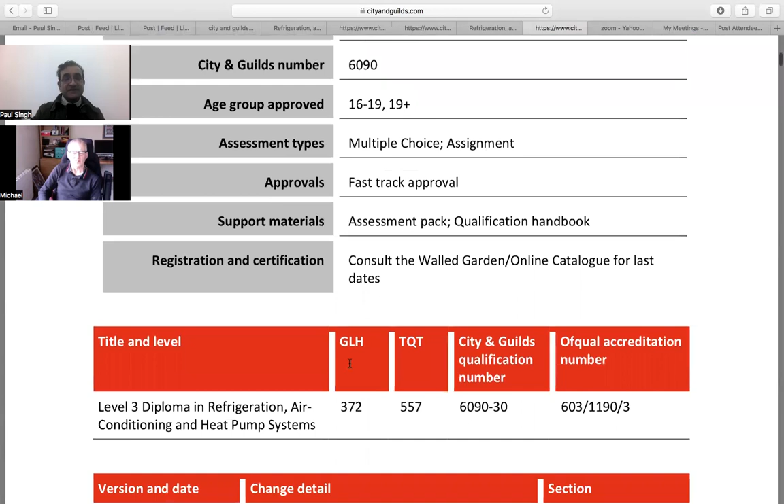Tend to forget the hours. These are just guided learning hours. That's the total qualification time. Forget that, this is just the updates.

So what we got there is this. These are the units now. This is what the engineer is having to work towards. You've got Unit 201, which is health and safety in the RACHP industry. This is a level 2 assignment.

Unit 301, applying fundamental principles to RACHP systems. Unit 302, complex RACHP systems. Unit 303, commissioning and troubleshooting complex RACHP systems. 304, work planning and organisation for RACHP systems. And then Unit 305, electrical power and control for RACHP systems. So that's the bulk, that's what they got to do.

Okay, so they got 201, 301, 302, 303, 304, 305, and those are the headings. If you go into the qualification handbook, it gives you a lot of information on how it was put together, all the information. And what we're saying here is that these are the unit titles.

So you've got health and safety, mandatory. These are the assignments, bits and pieces. And they tell you that's what the guided learning hours are.

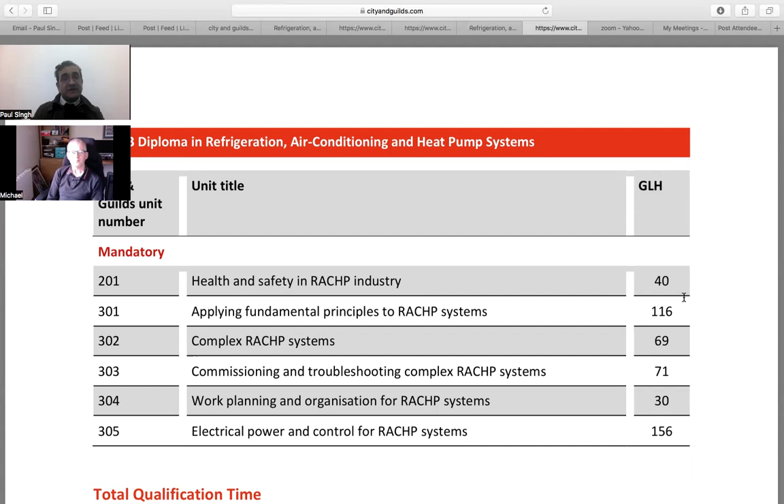So these are my experiences, what I've been doing, and this is what I want to tag on to. So we got those, I'm not worried about those. Then the centre requirement tells you what you need to be able to have, bits and pieces. And then you get into, this is telling you what this is.

So you've got 201, health and safety in RACHP. There's a practical assignment on that. In addition to that, there's a test as well, health and safety in RACHP industry. It's a multiple choice test.

Then if you look at the rest of it, 301, applying fundamental principles to RACHP systems, that's an assignment. 302, complex RACHP systems, that's an assignment. Commissioning and troubleshooting complex RACHP systems, that's an assignment. And then work planning and organisation for RACHP systems, that's an assignment. And then electrical power and control RACHP systems, that's an assignment as well.

Now, to cut through the chase, the health and safety test is an online test. The practical assignments here, that's a practical assignment, so it's hands-on. They have to physically do safe isolation, be able to use steps, apply health and safety, put up scaffolding, pressure testing, and that's part of the assignment.

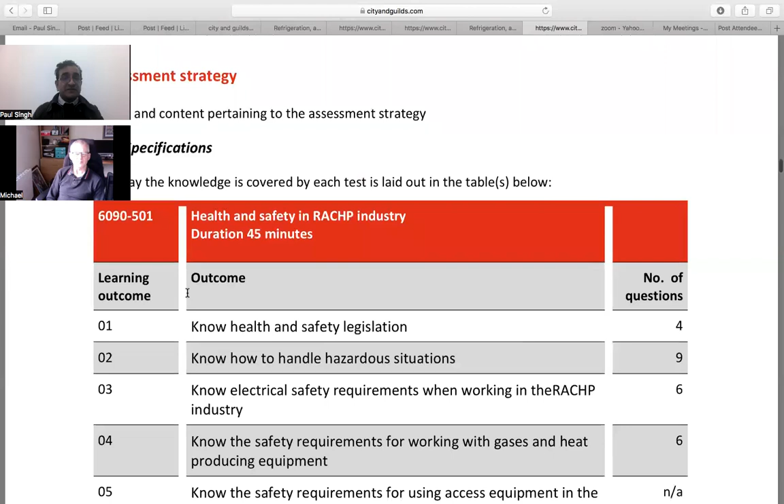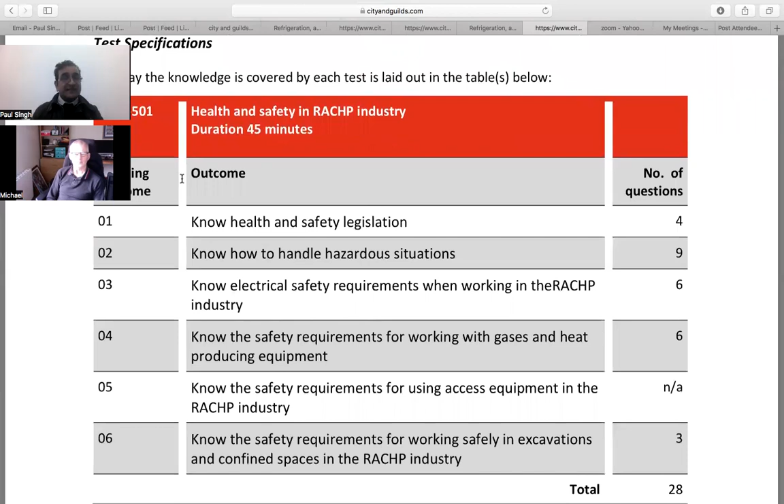If we break down the health and safety, this is telling us what they need to know. So for the test, there's 6 sections, and these are the number of questions. So I do apologize, 28 questions.

So this is telling the engineer. What I tend to do is say to the engineer, look, do you know about that? Do you know about that? And what you don't know about, let's discuss it, because we can actually go into the syllabus, a bit like a skill scan.

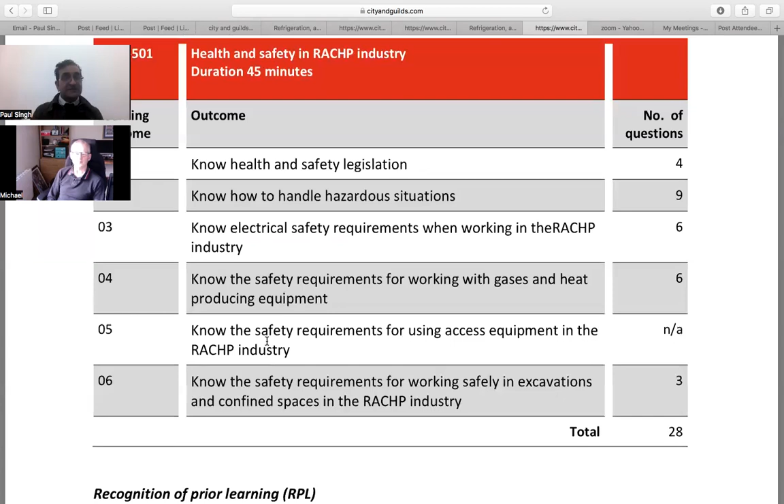So, for example, and I do this all the time, this is the unit, this is what they need to know about, the theory side of it. We just say, do you know that lot? And I'll sit them down and they tick off what they can do, what they don't know, and then we make a training plan.

I had a situation with this particular engineer who came in and said, yeah, I can do that. So I said, okay, let's book you a test. And they sat it and passed, 85%. So if they know it, I only need to teach what they need to know, and then they sit the test and pass.

I do find with health and safety, a lot of it you'd say is common sense, and a lot of it should be obvious. But there's always things that you haven't seen that someone else has.

That's right, very important. I have got that qualification, it's just something I never thought to tell you. I have got a health and safety, I've done the skills on site because we've needed them in the past, and to me they're so easy to pass. But it doesn't mean that's right for everyone, because you're experienced.

If you think of a 16-year-old who's just been on site for 2 weeks, there's no way they're going to know all that. Of course not. And that's where the training comes in.

Of course, and if we've got competent engineers, they'll fly through this. I've had engineers who'll say, yeah, I'll have a go. They'll read it and say, yeah, I know that. Okay, sit you down, pass it. So they've saved that many hours.

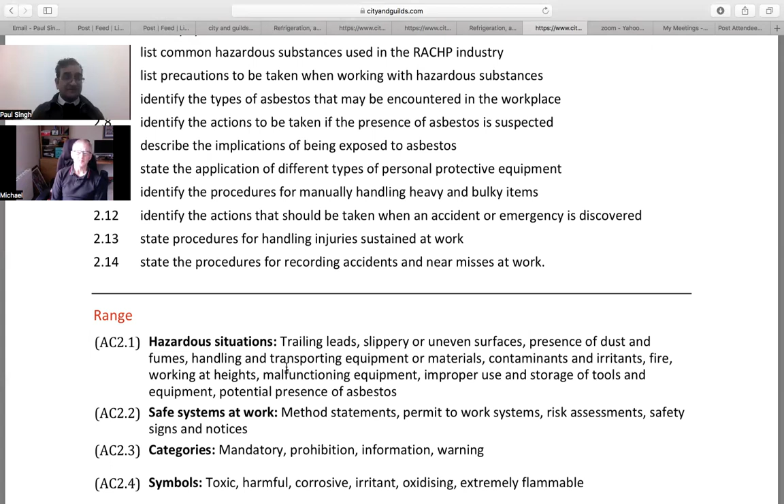Yeah, that's it. I've done asbestos courses, maintaining scaffold towers, all those sorts of things, and it's handy to know things you wouldn't have thought of. A lot of it is excavations, trenches and excavations, they can collapse and stuff like that, they need to know about. The other one is asbestos, the 3 different types of asbestos and all that lot. So there are bits that they need to know, they don't come in knowing everything.

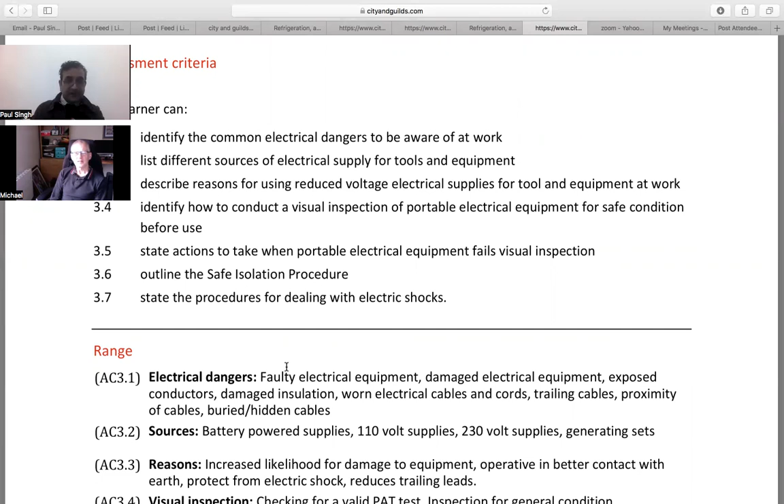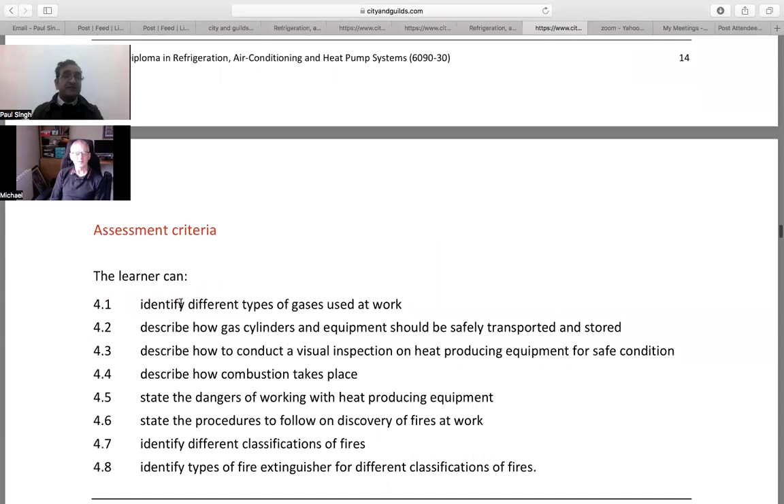I do sit down and do a tutorial with them, whether it's like this or face to face, it doesn't matter really. So we've got the unit, and they tell you what they need to know about and what they're going to be assessed on, the assessment criteria, so the learner can do all that lot. That goes for each unit, so that's the health and safety one.

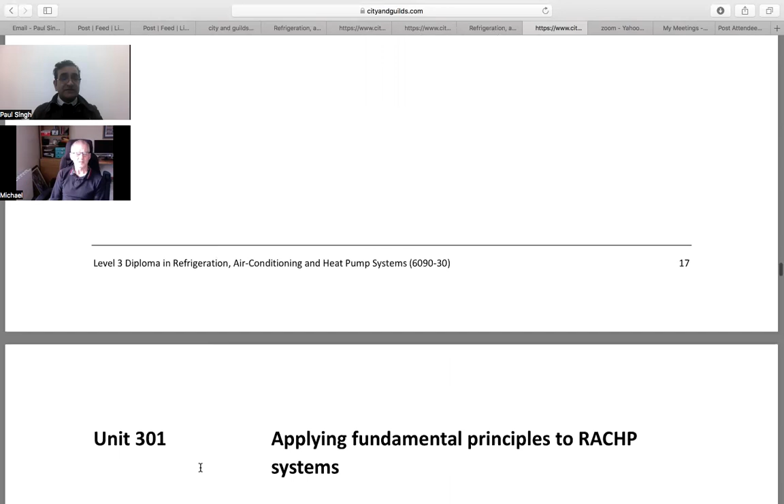If we look here, Unit 301, applying fundamental principles to RACHP systems, this is a theory one. It's saying here, if you look at the unit aim, this unit allows learners to explore fundamental principles to develop their understanding of RACHP systems. There's particular emphasis on system design and efficiency, and the use of both Ph and psychrometric charts as data sources. The unit concludes with theoretical calculations being applied to a range of practical systems an engineer is likely to encounter. So there's no test on this theory.

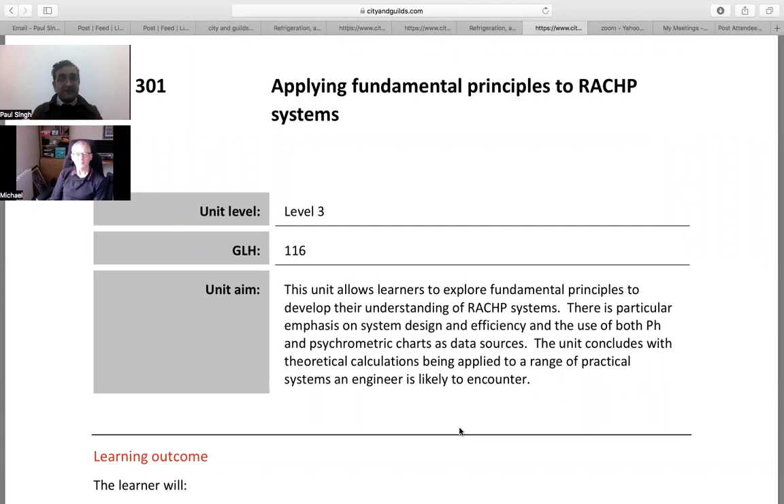This is telling you what the engineer needs to know, and if they can do that, then they can attempt the assignment, because they've got an assignment book as well that they do. So for each unit, 301, 302, 303, 304, 305, we've got the syllabus items. Based on the syllabus items, City and Guilds have got assignments that the engineer does when he or she is ready for them.

So my philosophy, my thought process would be, can you do all this lot? And you probably can't, with respect. There'll be some tuition that is required, and then that tuition would be given to you like this now, or we could say, right, if you go onto this website, there's a nice video on this.

Look at it, so I'll be preparing you for the assignment. If you know all of that, then I can say, okay, let's just go through the assignment itself.

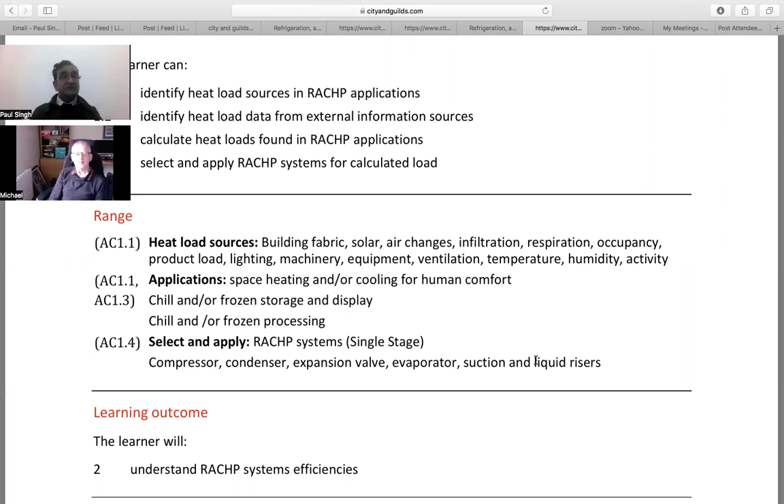So this bit is telling us about all the outcomes. It's 302. This one here, you're saying the purpose of this unit is to provide learners with the understanding of complex RACHP system components and their interrelationship for a range of applications. Learners will understand the construction and design of a range of system types operating on common refrigerants.

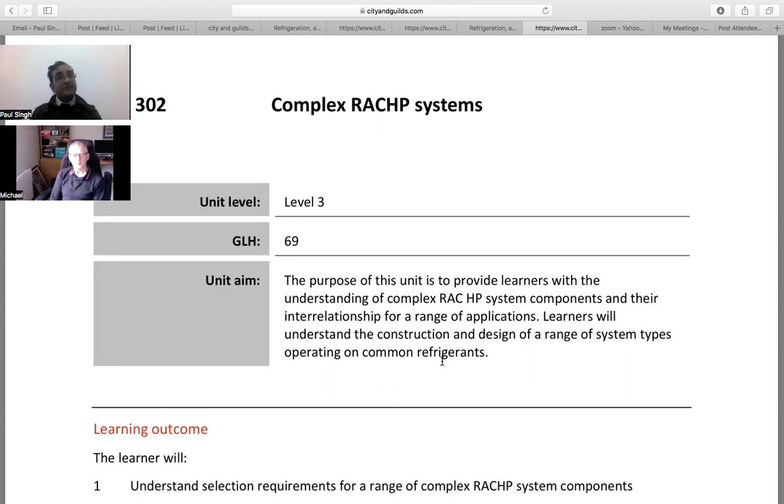So if we look through the RACHP systems, they need to look at direct expansion, flooded, pump overfeed, cold store, chill store, water chiller, VRF, VRV, air conditioning, ground and air source heat pump, cascade systems, compound systems, transcritical absorption systems, booster systems, different compressors, different refrigerants, hydrocarbons, HFCs, HFOs, R717, R744.

So it's complex. Yeah, well, it looks like it covers most things, doesn't it? Or probably everything. Yeah, more than enough.

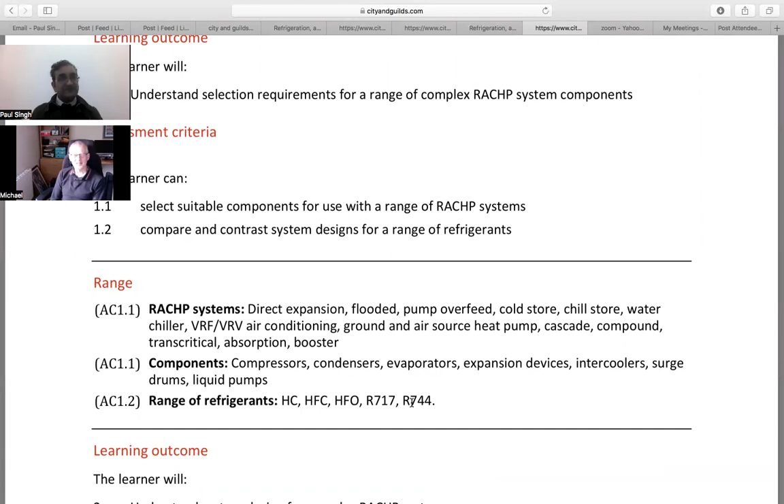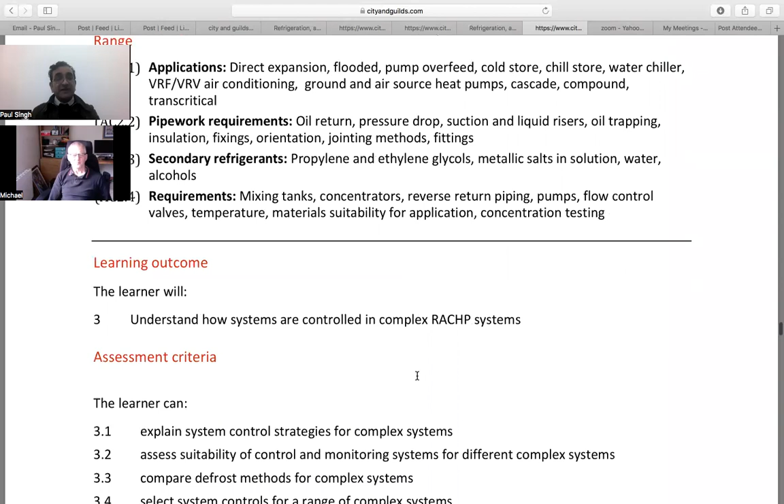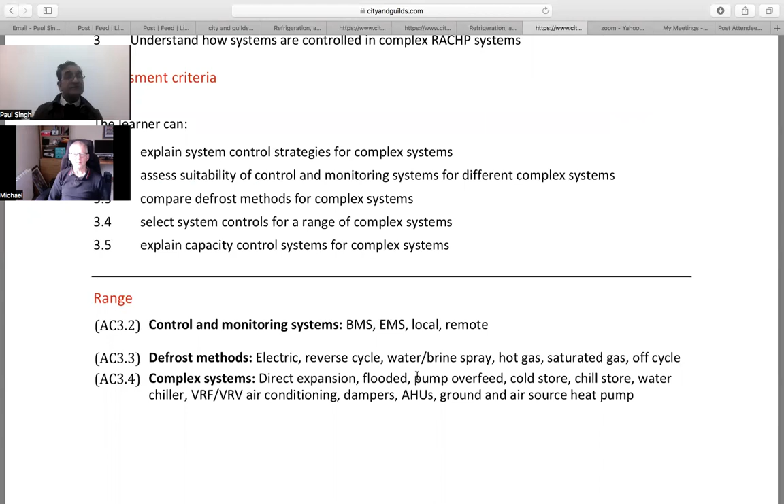Again, they've got to know all this assessment criteria, and then look at it. So what I'll tend to do is actually use this qualification handbook very much like a skills scan. For example, if someone said, 'Let's look at assignment 301,' I'd say, 'Right, can you do that? Can't you? What can't you do?' Get into that mode, and then give them the tutoring that they need. They're ready for the assignment, and then they can attempt the assignment. That's how I'm looking at it, Michael.

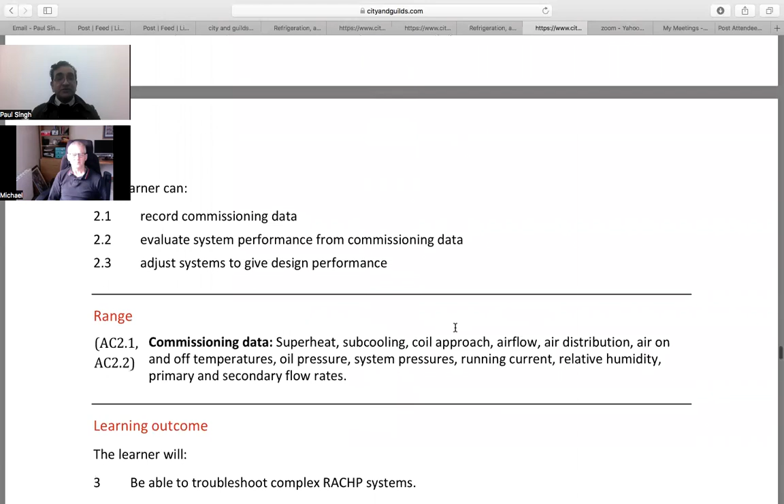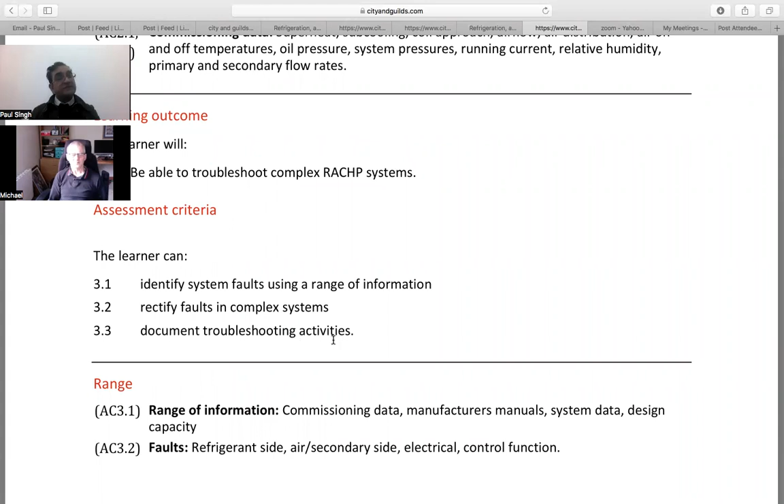Basically commissioning in bits and pieces, being able to commission, it tells you what you've got to do, and then they've got to be able to identify system faults using a range of information and rectify faults in complex systems and document troubleshooting activities. So they're commissioning, then they're troubleshooting it.

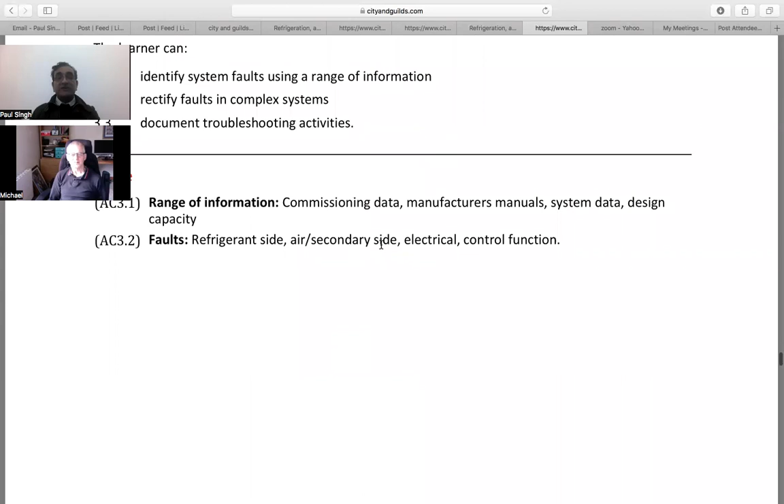So faults could be refrigerant side, air side, or secondary side. It could be electrical control function. So that's again, that's a practical one where they've got to commission systems and find faults on them. And there is, in the assignment pack, prescribed faults that they need to know about, and the assessor knows that. But certainly you cover all faults anyway.

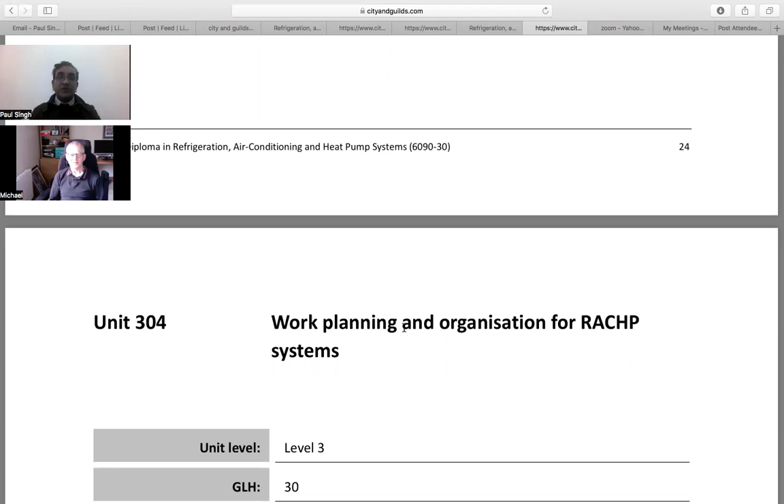The next one, 304, work planning and organisation for RACHP systems. This unit has been designed to give students a broad understanding of organisation and work planning techniques. It is case study based, using real companies, so knowledge gained will be relevant and offer knowledge and understanding applicable to their career progression.

This assignment really is looking at asking the engineer to actually go and investigate their company and do a case study on how their company operates, and then compare that to four other companies. It's like a research project, 3,000 words. Now, heaven forbid, engineers hate writing, and to try and get them to do an assignment for 3,000 words, they're pulling their hair out. But that's what's prescribed.

And as you're going along, as you complete these modules or units, you can get a unit accreditation certificate. You don't need to wait till the end, and in fact, we don't - as students pass, we apply for their certificates. So you're building up your bank, so to speak.

Then if we look at 305, electrical power and control for RACHP. This unit develops in learners the understanding of 3-phase electrical circuits and their control. Learners will apply their understanding by developing skills required to construct electrical circuits appropriate to RACHP systems.

Basically, Michael, they've got to be able to understand circuits, schematic wiring diagrams, and they have to do the control circuits for a direct online system and also for a star delta starter. They do the circuitry for it, and then actually wire the control panel and the motor from a 3-phase supply.

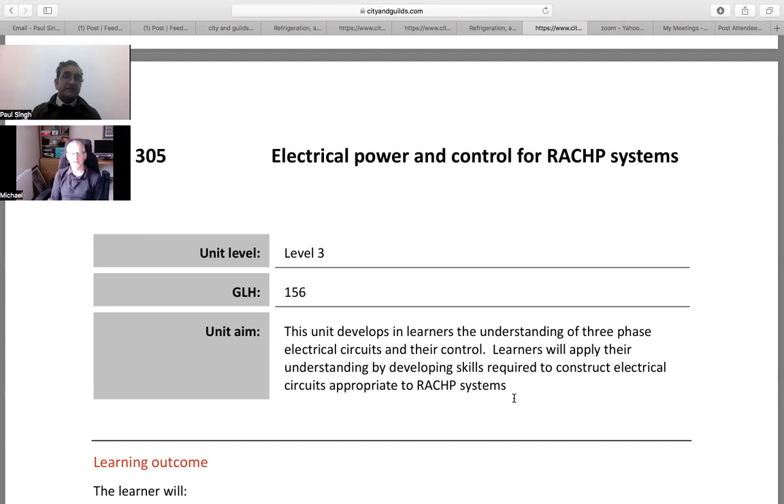The only difference really is doing something on site. The conditions aren't always as they are in the classroom. You may do the same job, but then apply it working behind a bar, in the rain, because everything's outside. But that all comes with experience.

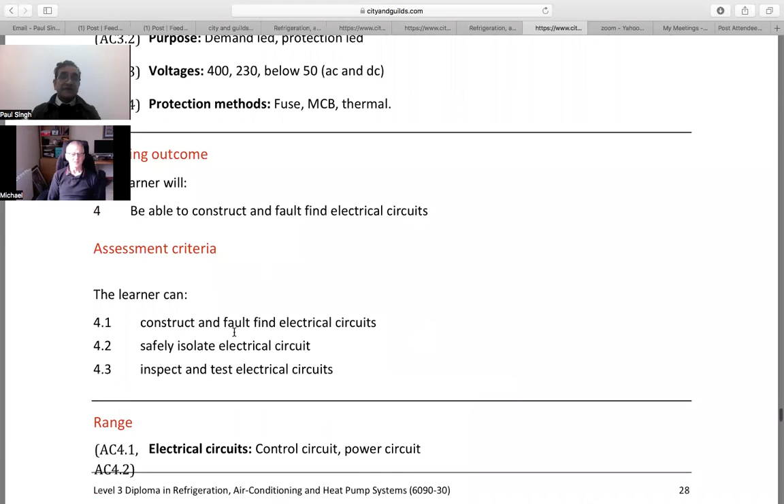What I'm saying is they've got to know about motors, three-phase, control circuits - all of that. They need to know all the processes, and this is the assessment criteria: be able to construct and fault find electrical circuits, safely isolate electrical circuits, inspect and test electrical circuits - control circuit, power circuit, we know about that. And then carrying out insulation resistance, all the electrical tests that engineers tend not to do.

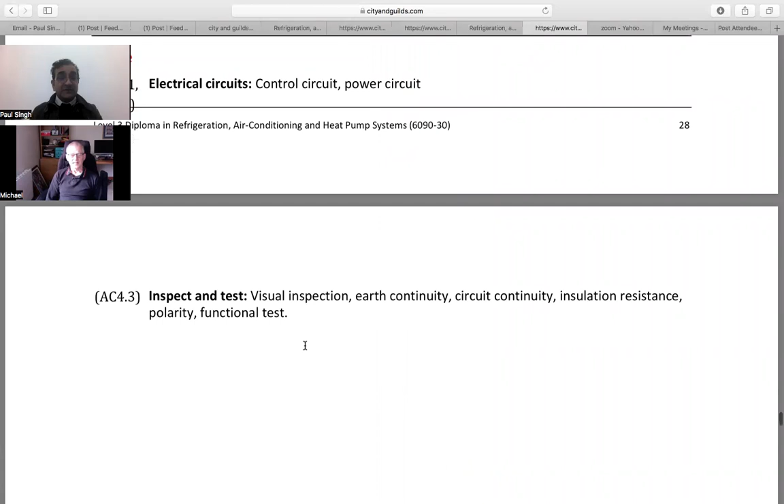They have to make sure they're done properly, people using a megger, and then they walk away from it without actually checking they've done everything properly.

It seems a really good course, Paul, very in depth. It is very, very in depth. The situation is that as a trainer, I can make it as complex or as simple as I want. My philosophy is I need to ensure the engineer is competent, that the syllabus items have been covered adequately, and that they've done the assessment as prescribed by City & Guilds.

So if you imagine this was done at your company in a workshop, you've got all the kit laid out and engineers coming in doing it - that's doable. What I'm saying is you could have the engineer putting in a three-phase motor, having to change one - the contactor's gone, the motor's gone, and they've got to rewire everything. That's no different to actually doing it in the workplace.

No, that's right. It's probably better because you've got the constraints and pressures of work.

Can I ask you a few questions about this course or things in general? Yes, of course. This is based on the number of people, particularly in the last 10 years, who call us - because we had our own brand of equipment - asking the silliest of questions. I do think some of these people have come from a plumbing or electrical background and thought, I'll install air conditioning, it's simple.

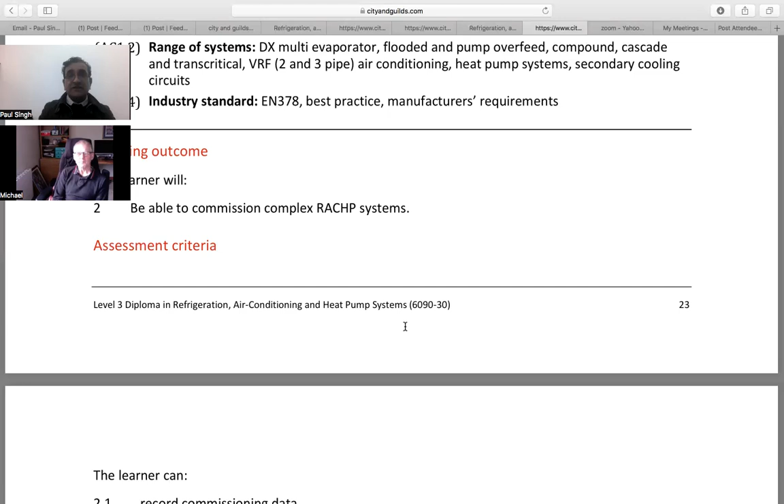In addition to that, the centre will have got a password-protected assignments book, where they've got all the assessments. So if I can just close this now - you've got that bit there, that's the centre documents. And if you go into assessment documents, these are all the assessment documents you've got. This is for both level 2 and level 3. So here, 6090-30, that's the assessment pack for level 3. The 6090-201, that's the assessment pack for level 2.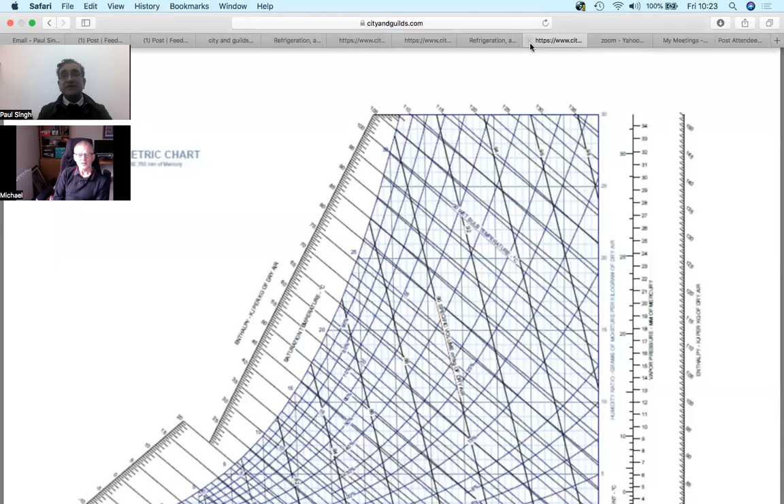Other bits and pieces, you've got sample tests for level 2, end tests there, bits and pieces - so these are sample multi-choice tests. For example, here, if you look at the health and safety one, you see it's password protected. So if we go to - I wanted to pick up this one here, the assessment pack here. Right, now that's password protected, and I can't tell you the password. I'm sworn to secrecy.

So this. I'll probably get it wrong. Okay, I missed something out.

Okay, right. So it's password protected, and then here. This is the assessment booklet - level 3 diploma in refrigeration air conditioning assessment pack, and that tells you.

So this is the assessment pack. This is telling us what they've got, what you've got to do, what they've got to do, the engineers.

So for example, here, we got content assessment, assessor guidance, assignment 301, assignment 302, assignment 303, assignment 304, assignment 305. Okay, and you've got all the bits and pieces here.

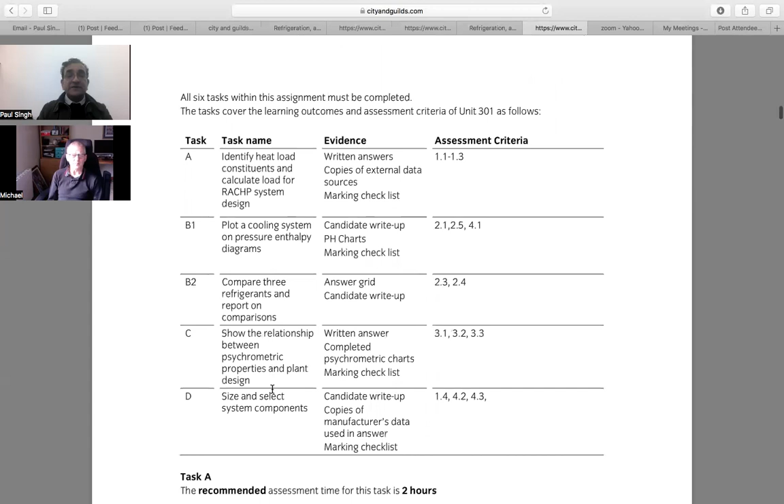So for example, this is again, that's the 301 assessment, okay? And it's saying applying fundamental principles to RACHP systems. And there's an assignment overview. Can you read that all right or not?

I can see, yeah, but my eyes looking at the screen are watering. But I can see it's clear. It's okay, just my eyes for close up. So what we're saying is, okay, let me just make it a bit smaller.

So there's task A, and it's saying identify heat load constituents and calculate load for RACHP system design. Then B1 is plot a cooling system on pressure enthalpy diagrams.

B2, compare 3 refrigerant and report on comparisons. C, show the relationship between psychrometric properties and plant design. Size and select system components.

Okay. And then the evidence that the engineer has to provide is written answers, copies of external data sources, marking checklist. Candidate write-up PH chart, marking checklist, and so forth.

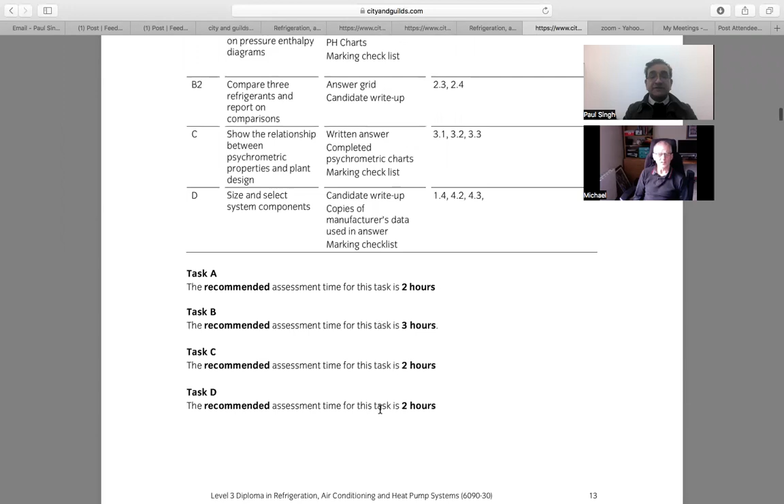So this is prescribed. So again, this is a recommendation. Task A is 2 hours. Task B, 3 hours. Task C, 2 hours. Task D, 2 hours. Now, that's just an indication of what the assessment should entail, how long it should take. Yeah. Approximately.

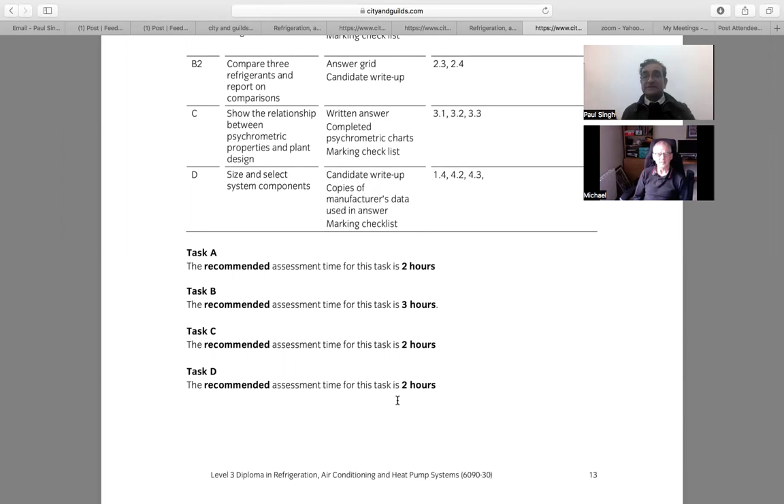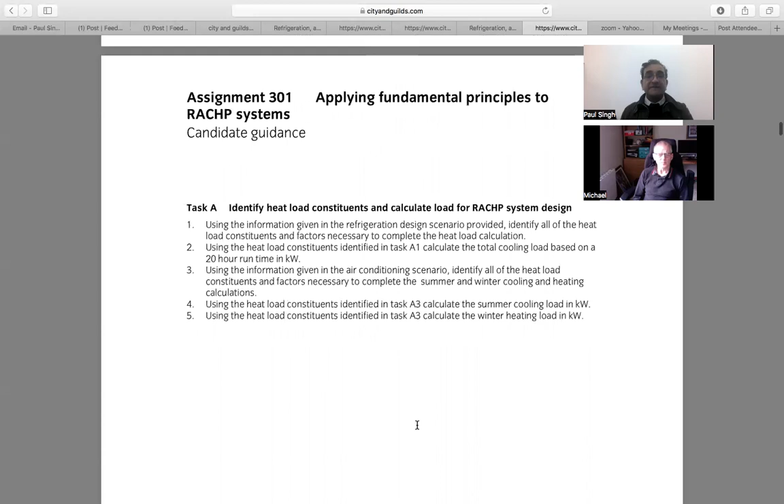This is the information for the task for the assessor, and this is for the candidates. So this one here, for example, I'll just look at this one. Task A, identify heat load constituents and calculate loads for RACHP system design.

So number 1, using the information given in the refrigeration design scenario provided, identify all of the heat load constituents and factors necessary to complete the heat load calculation. Using the heat load constituents identified in task A1, calculate the total cooling load based on a 20-hour runtime in kilowatts. And then 3, using the information given in the air conditioning scenario, they got both refrigeration and air conditioning

scenarios. So you're doing heat load calcs for refrigeration and for AC as well, Michael. Right, okay.

Using the information given in the air conditioning scenario, identify all of the heat loads, constituents and factors necessary to complete the summer and winter cooling and heating calculations. Number 4, using the heat load constituents identified in A3, calculate the summer cooling load in kilowatts and then calculate the winter heating load in kilowatts.

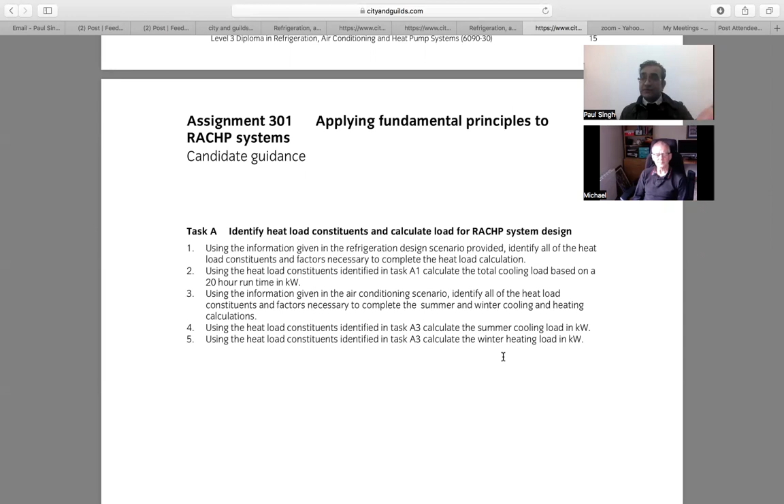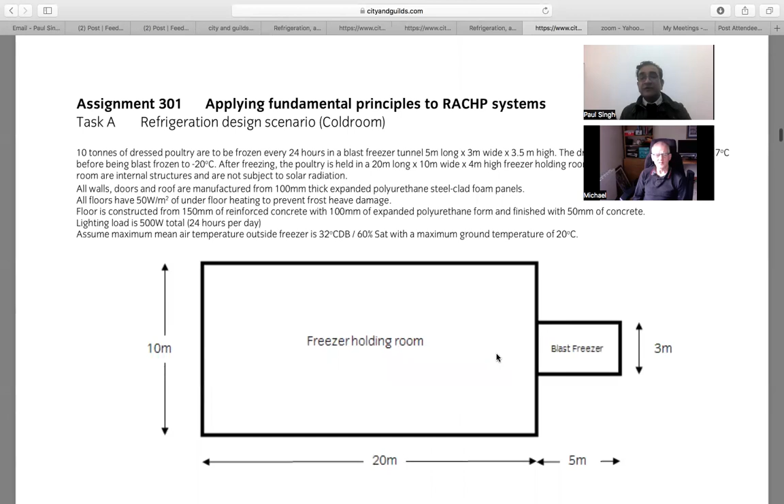This is looking at the heat load calculations both for refrigeration and for air conditioning, for summer cooling and winter heating. They've got a freezer holding room, blast freezer, and that's what it's based on, so you do calculations on that.

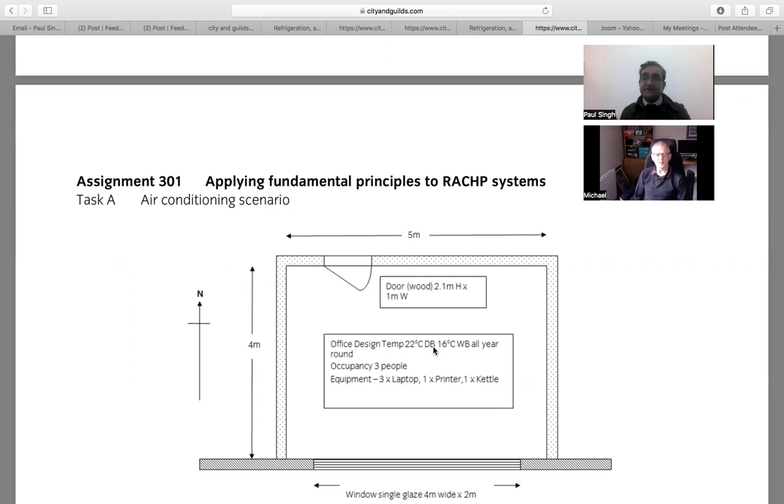And this is for the air conditioning scenario, looking at all the bits and pieces. What I'm saying is that's more like a design scenario, which could be done in the office. So that's the kind of thing there.

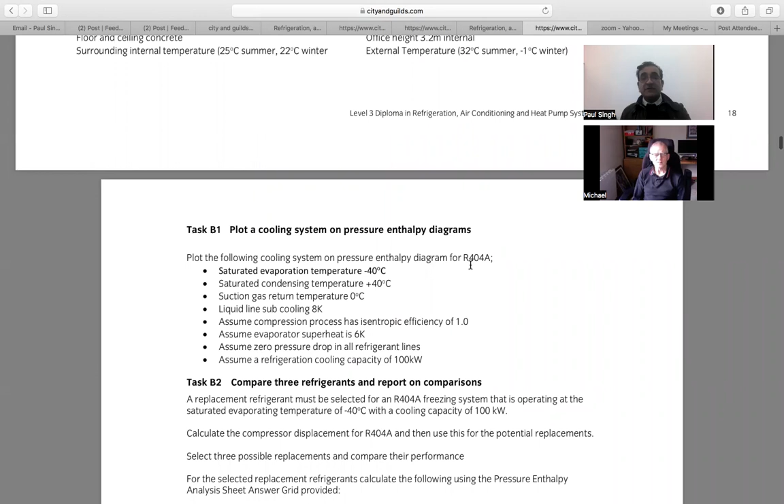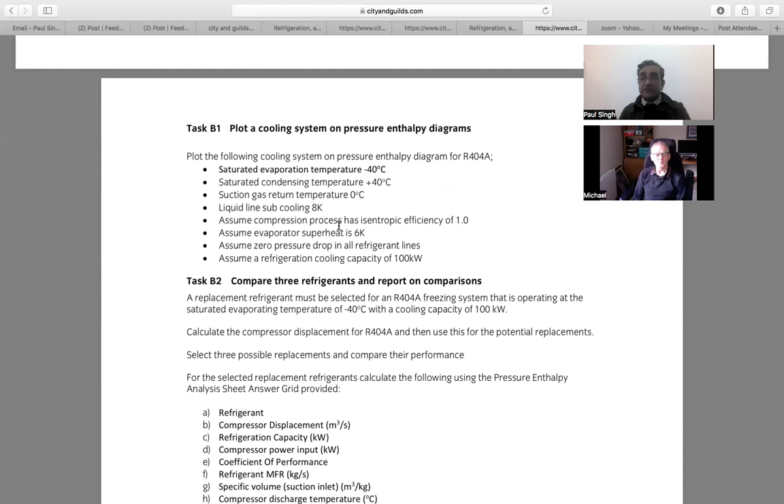This one, task B1, plot a cooling system on a pressure enthalpy diagram, for R404A. It gives you the bits and pieces, and then they want you to compare 3 refrigerants and report on comparisons. So they've got 404A design, you look at 3 different refrigerants with the same criteria, plot those and make comparisons. So you're really sorting out which is the best refrigerant alternative if you're going to retrofit 404A.

And then you have to calculate the compressor displacement, refrigeration capacity, compressor power input, COP, refrigerant mass flow rate, specific volume, suction inlet, compressor discharge temperature, compressor suction pressure absolute and pressure ratio. These are bits that you have to get from that. Again, not expecting everyone to know it, they'll have different bits or zero knowledge, and that's where the training will need to come into it.

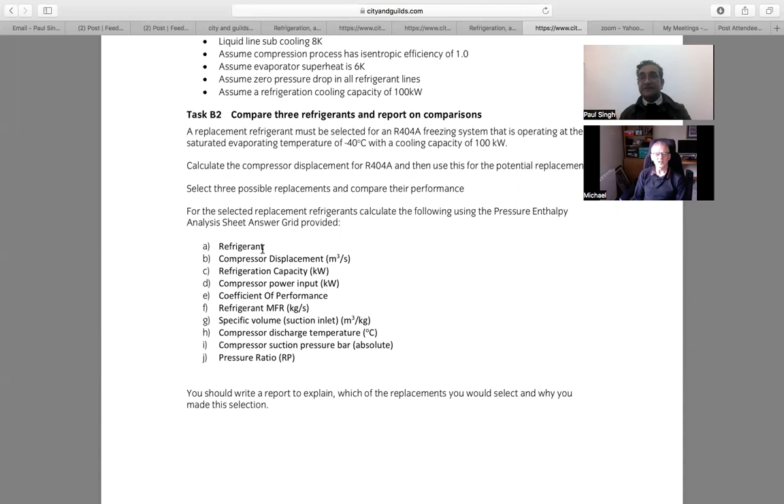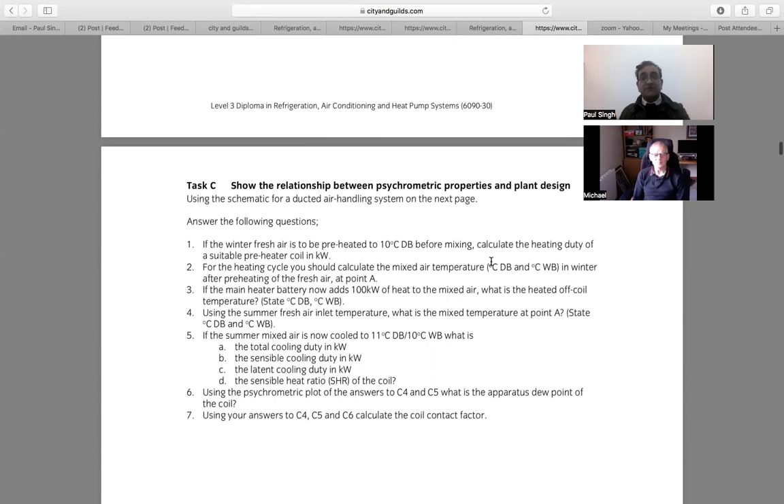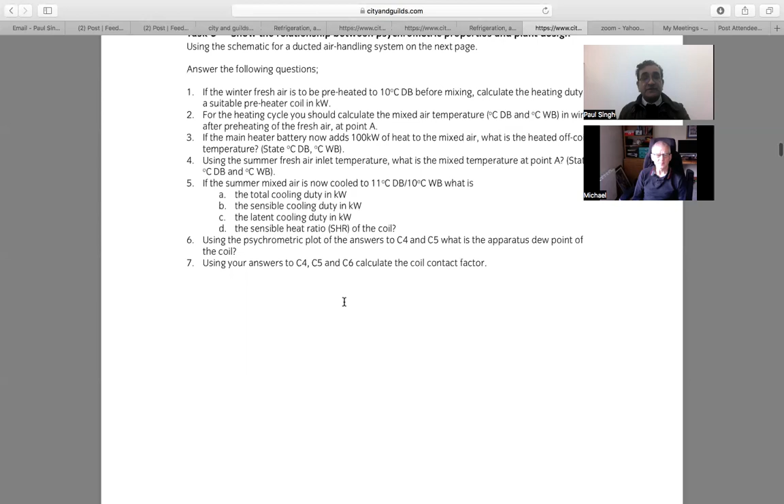This task is to show the relationship between psychrometric properties and plant design. So you plot a pressure and psychrometric chart on a pH, having done the pressure enthalpy diagrams, then the psychrometric chart needs to be done, and it tells you. Then this is a ducted air system schematic looking at the conditions and plotting the psychrometric on that.

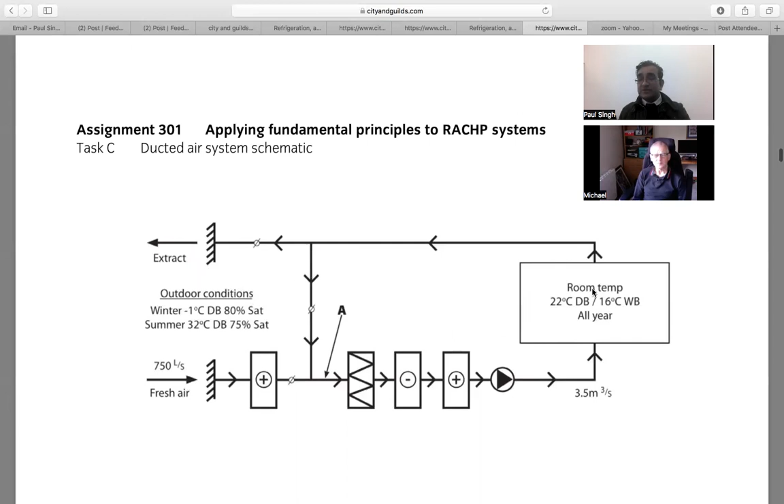So what I'm saying, that's a theoretical assignment. If we looked at a practical assignment, just going through, I looked at the electrical power one. Let's have a look at 305, electrical power and control for RACHP systems.

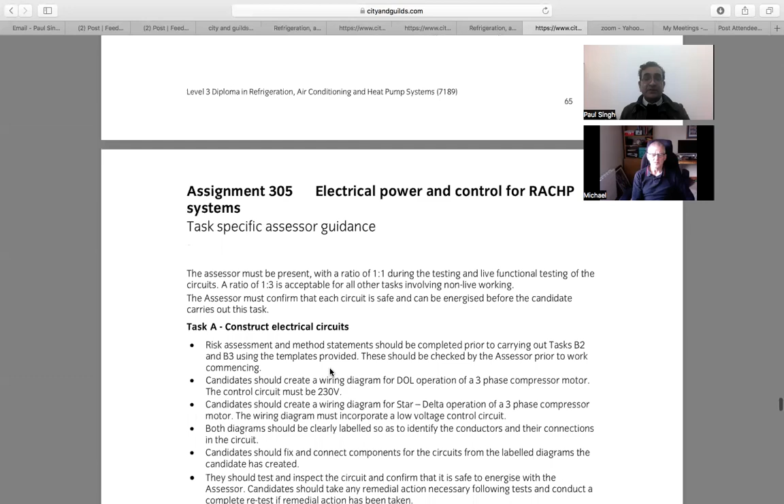So here, for example, I can read this out. Candidate task A, construct electrical circuit. You must complete a risk assessment and method statement prior to undertaking task A. The assessor must confirm that these are satisfactory before undertaking task A. You will complete a risk assessment and method statement prior to carrying out the practical elements of this task using the templates provided. These should be checked by the assessor prior to work commencing.

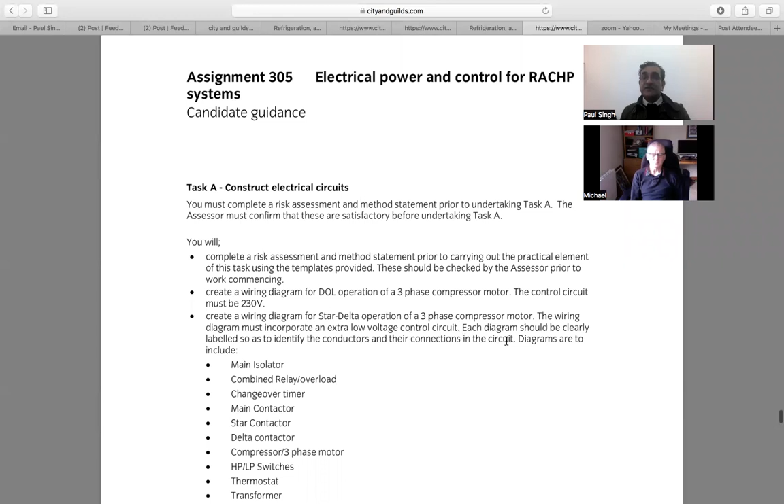Create a wiring diagram for DOL operation with a 3-phase compressor motor. The control circuit must be 230 volts. Then create a wiring diagram for star delta operation of a 3-phase compressor motor. The wiring diagram must incorporate an extra low voltage control circuit. Each diagram should be clearly labeled so as to identify the conductors and their connections in the circuit. Diagrams are to include a main isolator, combined relays for overload, changeover timer, main contactor, star contactor, delta contactor, compressor or three-phase motor, HP/LP switches, a thermostat and a transformer.

Then it's saying fix and connect components for the circuits from the labeled diagrams you have created, test and inspect the circuit and confirm with the assessor that it is safe to energize. You should take any remedial action necessary following tests and conduct a complete retest if remedial action has to be taken. Before continuing, ensure your assessor has confirmed the circuit is safe to energize, measure and record the circuit parameters and complete the electrical test results table provided. Then next task B, diagnose and rectify faults.

You'll be given a job sheet giving details of a system that is not working. You will need to carry out a safe diagnostic procedure to identify the fault within the circuits, then discuss your findings with the assessor before rectifying the faults. Once the assessor has confirmed it is safe to do so, carry out the necessary rectification actions and testing of the circuit using appropriate equipment.

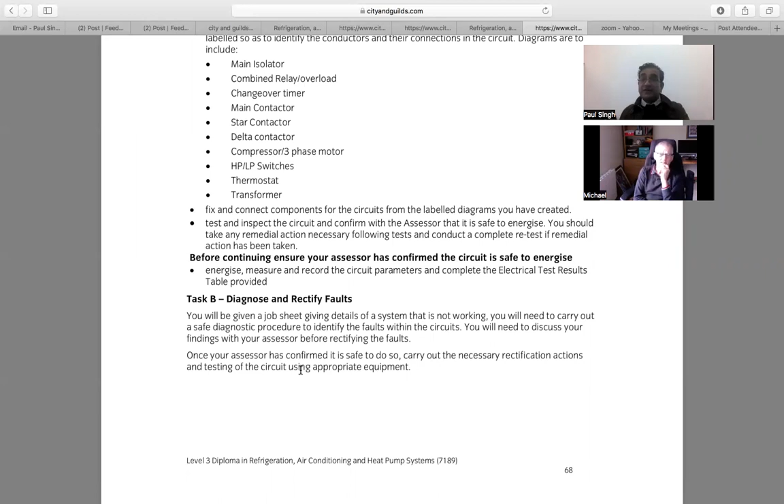So that's one assignment - wiring a three-phase direct on line, doing the circuitry for it, wiring it up, and then finding faults. This could be done in the workplace as well - as a service engineer, you'd be doing some of this anyway. Would you agree with that? Oh, definitely, yes.

And then this is the templates, evidence recording template, electrical test result table. So they've got to do a CPC test - that's for the earthing, that's for the line continuity. Satisfactory, yes or no - in fact I actually get them to write what the resistance actually is, so it's done properly.

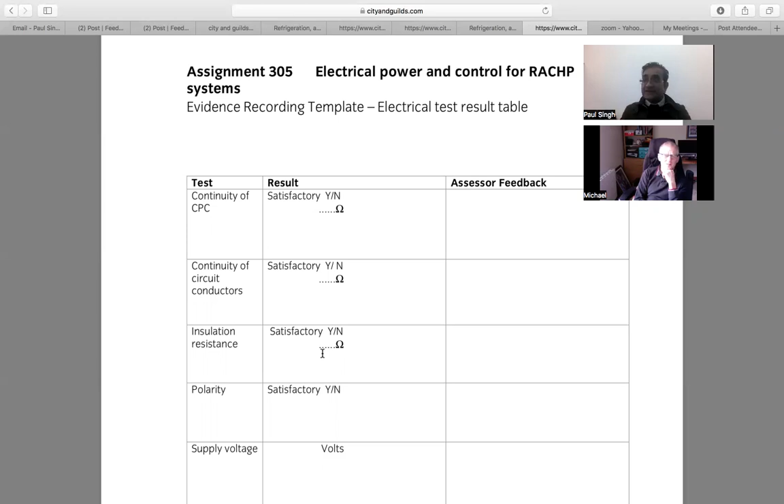Insulation resistance - satisfactory, yes or no, is not enough, because I want them to actually test across the phases and see what the resistance is, and at what test voltage they put in. 1,000 volts DC, that's what you'd expect to put in on a three-phase. And what resistance are you getting? Above 1 mega ohm, that's what we're looking at. Things like that, and then that sheet's there.

So then this is the assessment, the marking criteria - this is what the assessor gets. You've got the date of assessment, candidate name, candidate number, center number, assessor name. Now, internal verifier - that part of the quality assurance - used to be called IV, now called IQA, internal quality assurer. The assessments are sampled by the internal quality assurance person to make sure they've been done properly to City & Guilds standards. So we have the assessor, then the internal quality assurance person who samples to make sure everything's okay, then City & Guilds come out to look at the sampling of the documentation, and even observe an assessment going on.

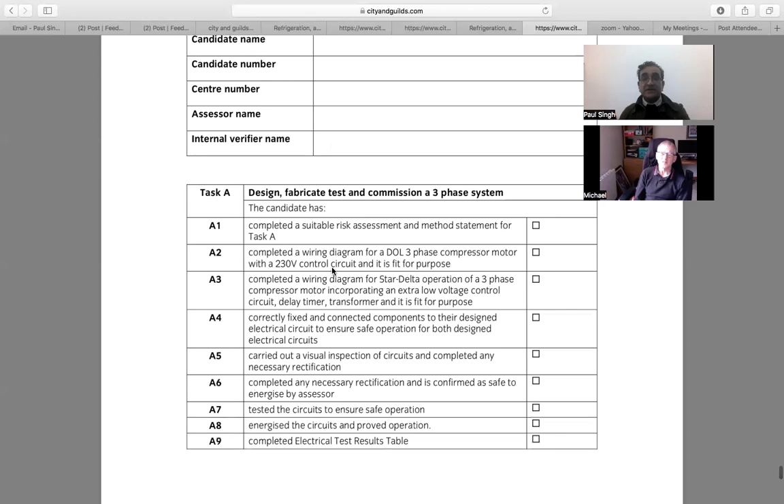And I've had situations where I've actually taken the EQA on site and said, right, we're doing an on-site assessment with this person, they're doing such and such, and they have to come out with us or meet me there, and they do it - all part of the parcel. So this is just ticking off that it's been done, covering all the bits and pieces. So that's the practical assignments.

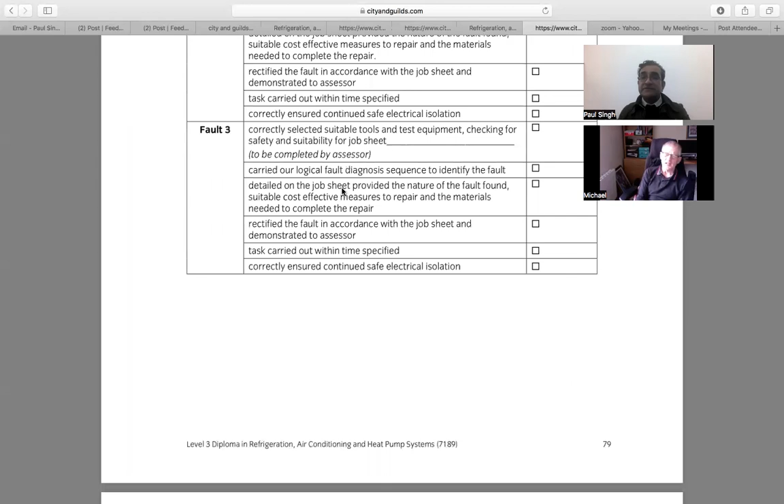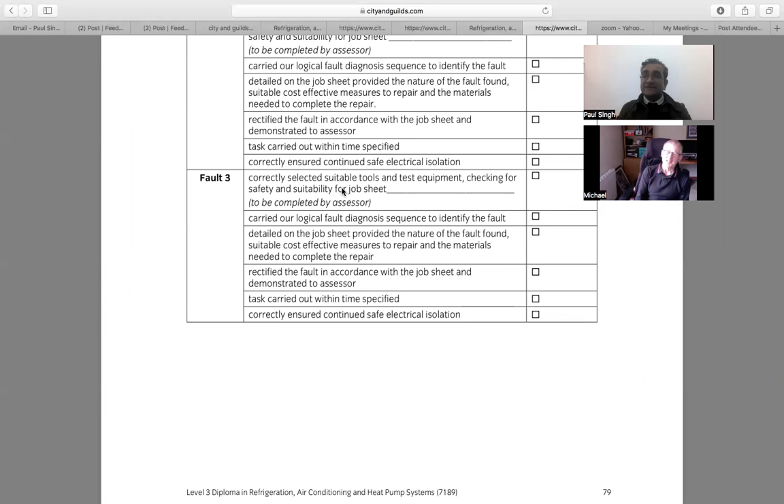On the faults there - would you leave perhaps a leak, or would you not do that? No, we put a leak on for the F-gas, but we put it on so that when they put the nitrogen in, they can find the leak that way. You don't actually put a leak on a system with refrigerant in it, as that would contravene environmental regulations. I did think that - but that is quite a common finding, and I thought, well, they're not going to find it if they don't do it. But like you say, if you do it on the F-gas with nitrogen, then you've covered it.

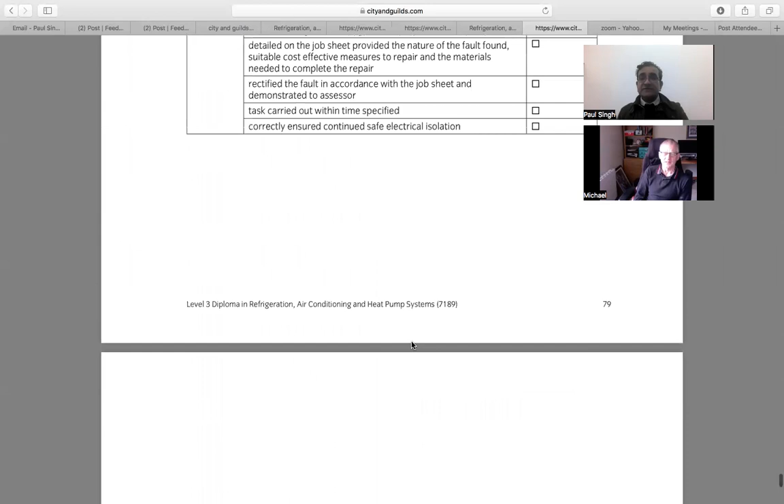Can you hear me okay, by the way? I'm quite a distance from the computer because I'm trying to focus in.

Can you hear me okay when I speak? I can do, yes, I can do.

So what I'm saying is each assessment assignment has got the assessor brief, the candidate brief, the documentation, the feedback sheet, and the marking criteria that the assessor ticks off, like a tick sheet.

Okay, so for example here, can you see this tick sheet here? All we're saying is design, fabricate, test, commission a three-phase system.

Completed a suitable risk assessment and method statement for task A. Completed wiring diagram for DOL three-phase compressor motor with a 230-volt control circuit, and it is fit for purpose. Completed a wiring diagram for star delta operation of a three-phase compressor motor incorporating an extra low voltage control circuit, delay timer, transformer, and it is fit for purpose.

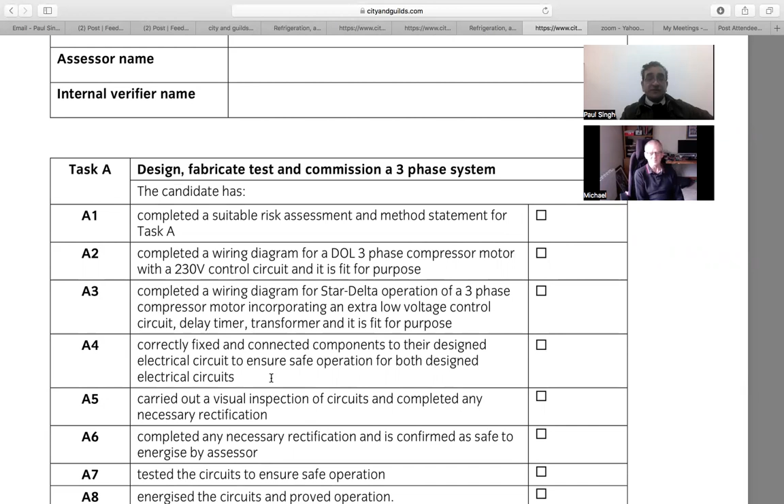Correctly fixed and connected components to their designed electrical circuits to ensure safe operation for both designed electrical circuits. Carried out a visual inspection of circuits and completed any necessary rectification, confirmed as safe to energize by the assessor.

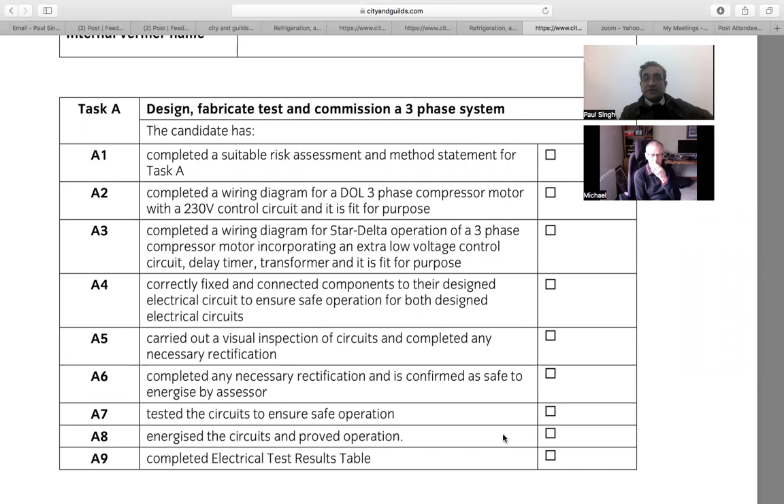Tested the circuits to ensure safe operation. Energized circuits, proved operation, and completed electrical test result table. Okay, so that's on the diagnose and rectify one.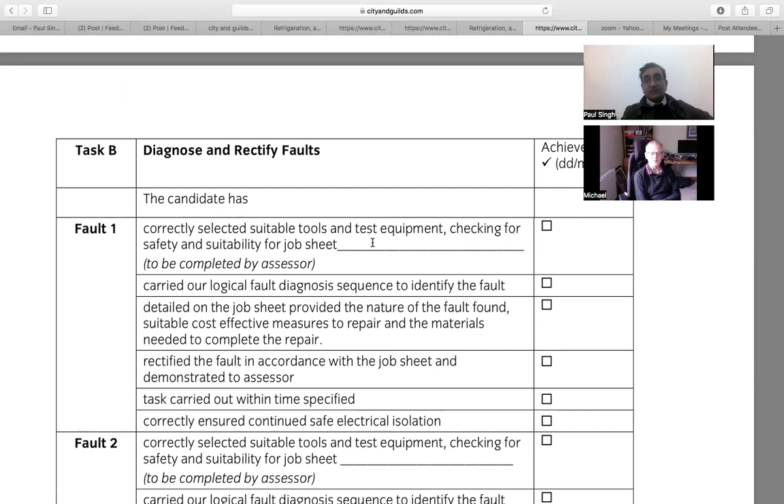The candidate has correctly selected suitable tools and test equipment, checking for safety and suitability for the job sheet. So there are 8 or 9 different faults that we can select, and we put job sheet A, whatever it is.

Carried out should be carried out - that's obviously a typo. I'm very persistent in the sense that I do pick up errors, and it grieves me because I'm thinking, who's proofread this? Well, a computer should do it, really, shouldn't it? Technically.

But anyway, so carry out a logical fault diagnosis sequence to identify the faults. Detail on the job sheet provided the nature of the fault found, suitable cost-effective measures to repair, and the materials needed to complete the repair.

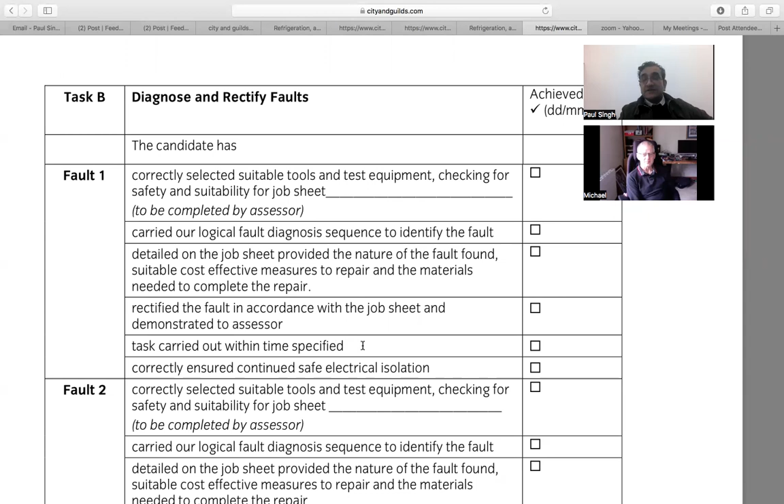Rectify the fault in accordance with the job sheet and demonstrate to assessor. Task carried out within specified time, 45 minutes per fault, or an hour. Correctly ensured continued safe electrical isolation.

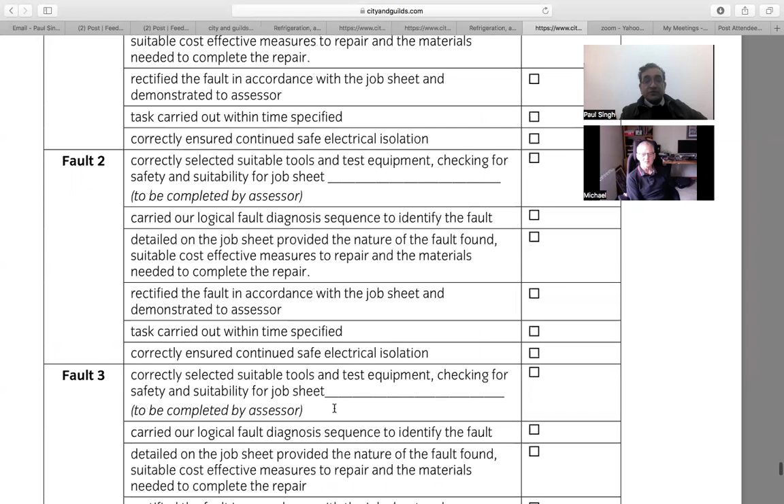So there's fault 1, fault 2, and fault 3 - they've got to find 3 faults, and the different faults. So that's it in a nutshell.

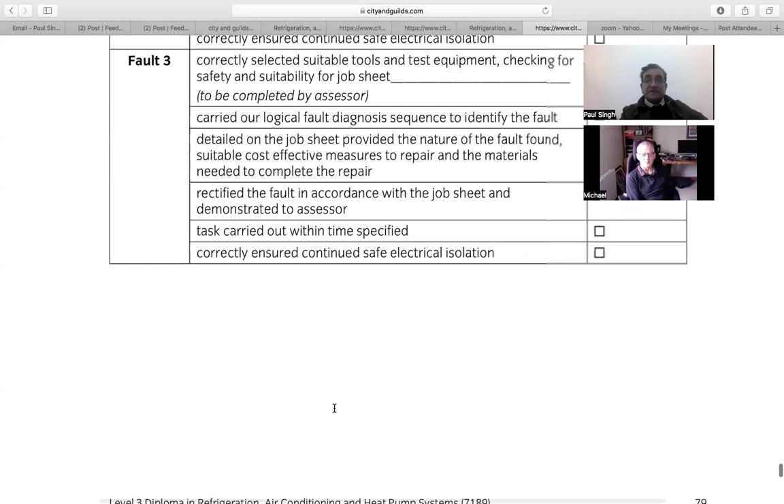You've got the level 2 health and safety online test, multi-choice, and that's common sense. Then you've got the health and safety practical assignments or practical tasks, and some of those can be done when they're doing the level 3 assignment. For example, if they're doing the direct online wiring circuitry, they have to carry out the safe isolation.

Yeah, so we can do that. I tend to integrate the actual health and safety assignments into the level 3, so they're not separate, because that's what you would do anyway, isn't it? It is, yeah. So I'm trying to do a holistic assessment, and what I'm saying is the theory side of it will be done by remote teaching and guidance, by Zoom sessions.

The practicals - I'm thinking these engineers won't need a lot of practical, but we could tell them what they need to be able to do, and they could either get the practice at work, or we can do a one-to-one to show how to do it. And there are ways of doing that.

But my main aim is to get engineers who can do it, most of it already. They're experienced engineers, and then they can actually get the qualification.

How does that sound? It sounds good. The course seems very good. Obviously, as I said earlier, I knew nothing about the course, I just knew it existed.

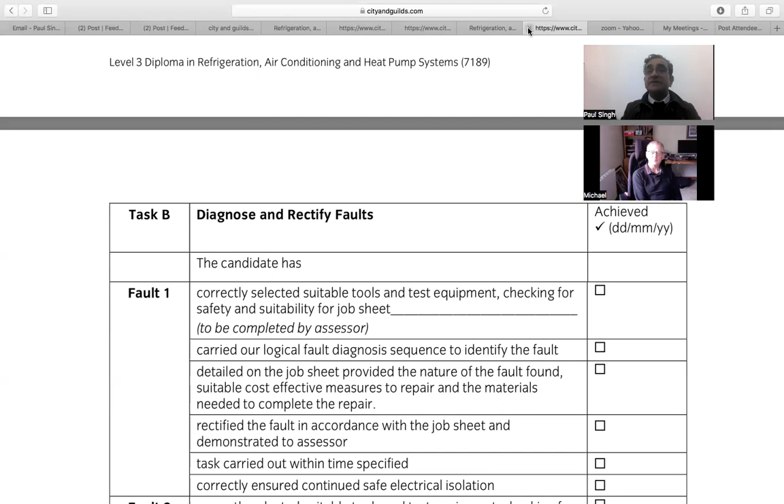I have got another document to show you. So what I'm thinking of is, starting 7th of February, I've got dates where I can do technical Tuesdays - technical in the evening, do the theory aspects of it, bits and pieces.

We say to the engineer, look, book a block a week off work and come in here - which isn't what I'm prescribing for level 3, because it doesn't warrant that. What I'm saying is with the level 3 lads, they'll know what assignment they need to do, what work they need to do, and then they can set that up on site. For example, if they're going to be doing a commissioning or some service, I can go out and visit them.

That's what used to happen with the level 2 and level 3 NVQs - we were allowed to do on-site assessments. At the moment, the way things are, there's no requirement to do any on-site assessments. That said, I've always been an advocate saying on-site assessments done properly, you can gauge a lot of evidence of how that person is doing.

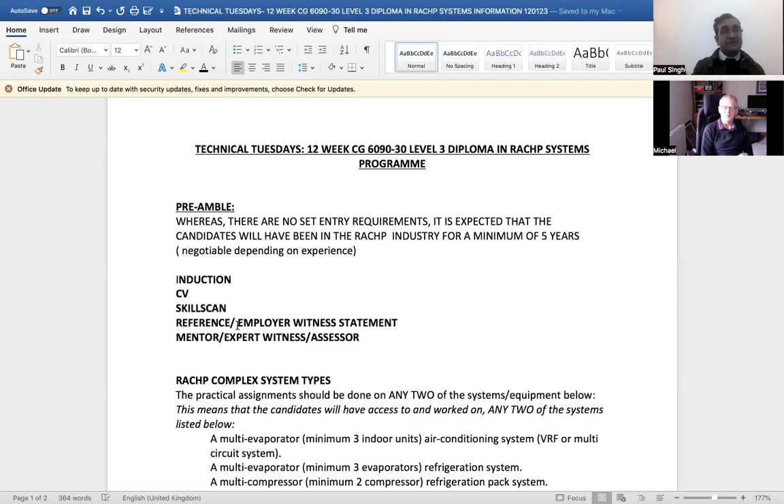And then what I'm saying is the system they've got to be working on practically, RACHP complex system types, because then the practical assignments should be done on any two of the systems or equipment below. This means that the candidates will have access to and worked on any two of the systems below. And this is out of City and Guilds.

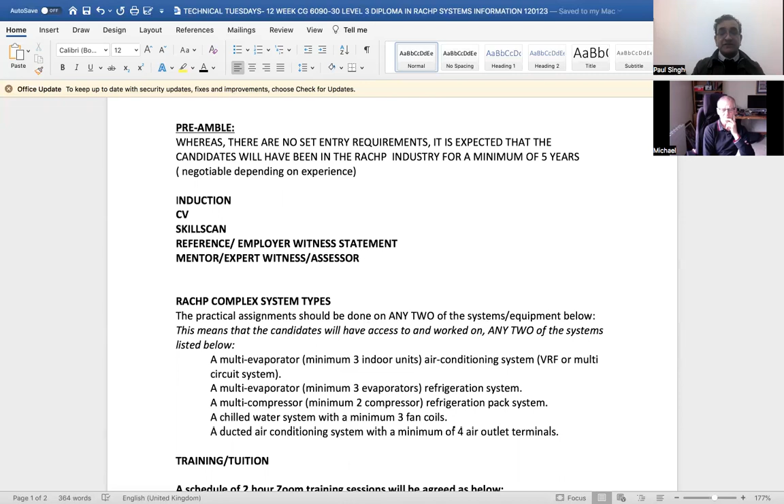So they can have a multi-evaporator, minimum 3 indoor units, air conditioning system, VRF or multi-circuit system. So a lot of AC goes in with that anyway. And then you've got a multi-evaporator, minimum 3 evaporator refrigeration system, it could be a supermarket or small convenience store. Then you've got a multi-compressor, minimum 2 compressor refrigeration pack system. Not all of them, but they've got to be working or have worked on these types of systems to actually gather to do the assignments.

A chilled water system with a minimum 3 fan coils possibly, and a ducted air conditioning system with a minimum 4 air outlet terminals. I would probably favour that the first 3 is what's going to be quite common for all engineers.

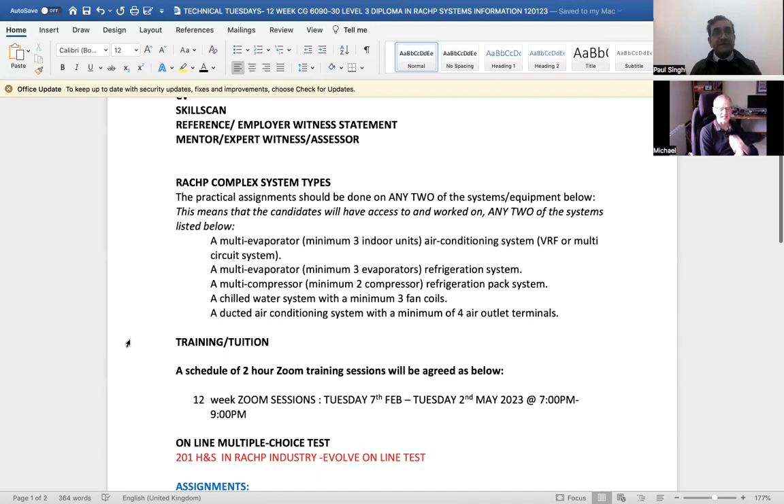Can I just ask, why not just a single system? Because it's a level 3, it has to be a complex system. I was going to ask why it keeps saying complex when I was reading it. By complex it means that it's not a single split, or a single cold room with a single evaporator, single condenser unit. So it's saying it's going to be a complex system in the sense that you've got a condensing unit and you've got 3 indoor units attached to it. That's the complexity - I get it now. I thought I knew what complex meant, and I was going to ask the question and thought I'd sound a fool, but I understand now what you're saying.

Okay, and then I'm looking at the training and tuition bit. I'm saying a schedule of 2-hour Zoom training sessions will be agreed as below, and I've got the date - 12-week Zoom sessions. I'm looking to start Tuesday 7th of February through to Tuesday 2nd of May, 7pm till 9pm. I've taken out holidays, so we've got Easter in that as well, and half-term bits and pieces, just because I'm conscious that the people doing this program are going to be family people with responsibilities.

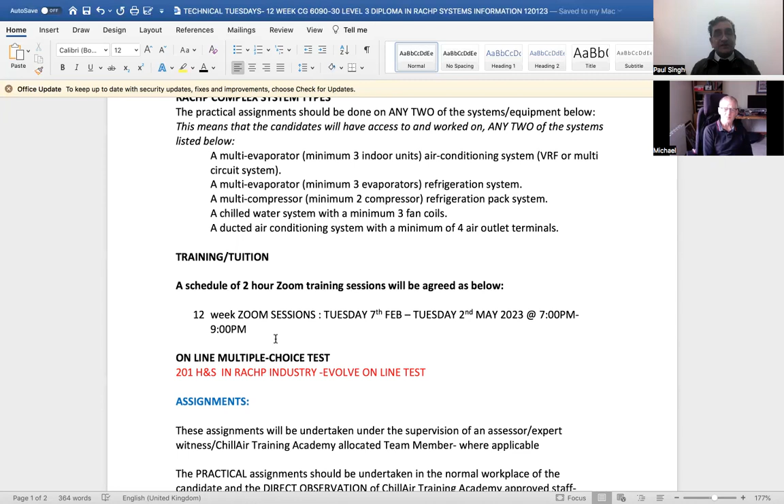So they want to go for Easter, they want to go half, so I've taken that into consideration as well, not just that you're going to work through Easter. And it is flexible in the sense that that's my intimation at the moment, and it might change. So as regards what they have to do, there's an online multiple choice test, the 201, and the health and safety in RACHP industry.

That's the online test, and that's 28 multiple-choice questions. It may transpire that we start off looking at this holistically, and it might transpire that everyone's close by.

So what they'd need to do the online test is a laptop. For example, I do a lot of training up and down the country, and to do online tests I've got a laptop with the platform on there. If I go up to Hull, in my hotel room I'll hook up the computer, and then an engineer will come and do the test in the hotel room. Again, it's individuated.

So there's that bit there. And then the assignments - these will be undertaken under the supervision of an assessor, expert witness, or allocated ChillAir Training Academy team member where applicable. So there's got to be some sort of supervision. They can't be left on their own.

The practical assignments should be undertaken in the normal workplace of the candidate under the direct observation of ChillAir Training Academy staff - it could be the assessor, a supervisor, or an expert witness. I'm thinking someone who's competent and qualified can actually carry out the assessment.

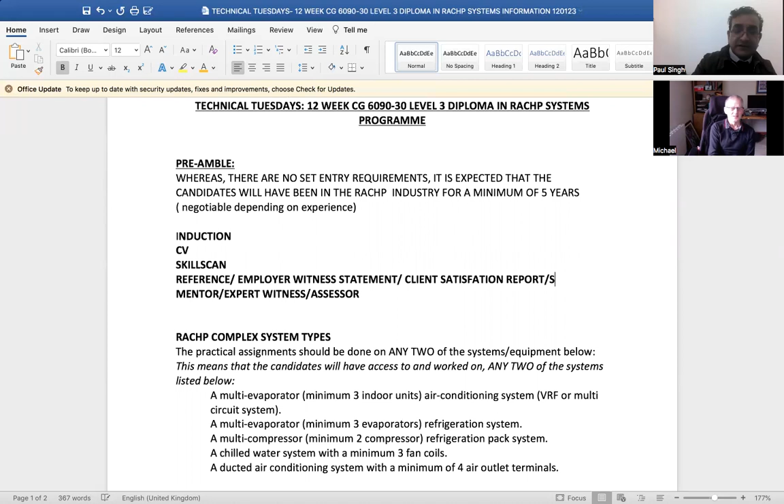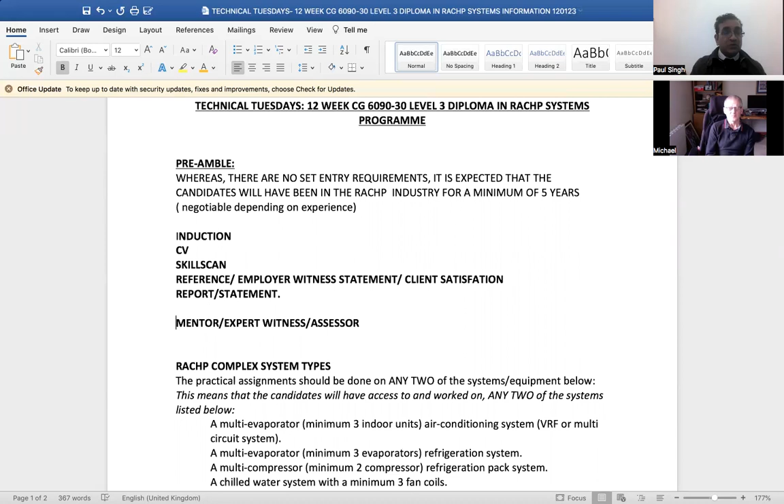Okay, and the other beauty of this, how we're doing it, is this is being recorded now. What I'll do is I'll actually put it up onto YouTube. Then I can put a link for whoever wants to see this, and all I do is send the engineer or the trainers the link, and they click on it and watch it on YouTube. So they can watch this session we've had on YouTube, and imagine this being a training session on, say, commissioning refrigeration systems. It would be a discussion like this, and then I'll send them the link.

So they haven't got to take any notes, actually.

That sounds okay. Tell me one thing, Paul - what do you want me to do? How do you want me to be? Okay, two things. In this, I see you as supporting me delivering this eventually, and I also see you getting involved in doing the program yourself, learning from it.

Right, yeah, that's how I see it. So I see it twofold - one, you as a student or a candidate, and then also helping me deliver it outside. How do you see it going, or how would you like to see it going?

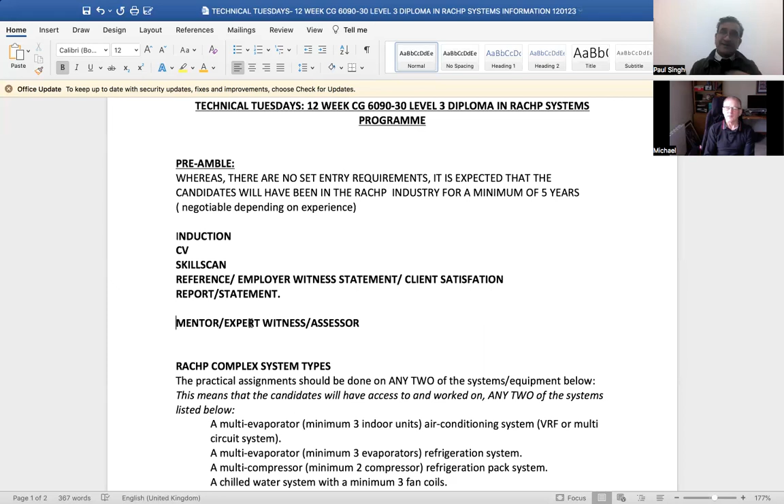So what I'd like you to take away from here is, I'm going to put this onto YouTube, okay, I'm going to email it to you, possibly - in fact I don't need to, because that sheet that we discussed is here anyway.

Yeah, so these are the systems there, and that's probably a sheet that I need to look at. But thank you for the addition of the client bits and pieces and the spelling error. Happy with that, yeah. We still make a good team altogether.

Just what's this part that was covering English and maths? Obviously, that was if you were doing an apprenticeship, proper apprenticeship, with the government funded, then you'd be doing an endpoint assessment process. That's the apprentice qualification now, the 60/90/50 EPA standard. Then to achieve, to make the gateway, the entry requirements to get onto the gateway for the EPA endpoint assessment is, you got your maths and your English. You need those passed, you need to get your F-Gas passed as well.

Additionally they have to fill out what's known as an apprentice development journal. It's a bit like a logbook of all the jobs they do. In fact, there's 21 tasks that they have to do throughout the 3-year process in the workplace: compressor change, pressure test, reactive maintenance, electrical fault finding, installations, commissioning, decommissioning. It's prescribed, and they have evidence of that in a logbook, like a portfolio of evidence, and then that's the entry requirements. So you got maths and English level 2, you got the F-Gas qualification, and we call it the Apprentice Development Journal, completed with relevant evidence to prove competence in the tasks.